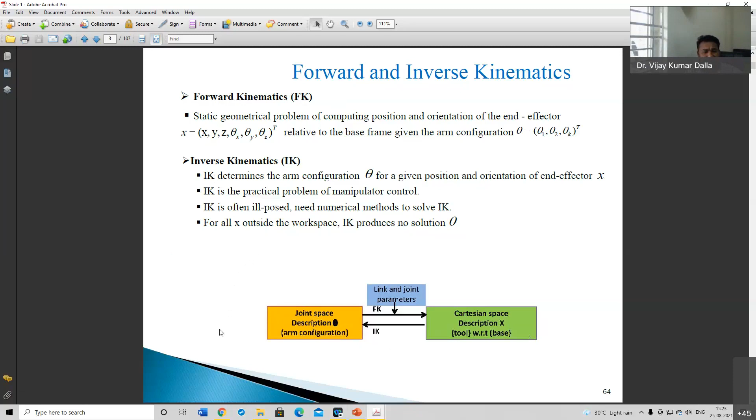And more practical is inverse kinematics. In inverse kinematics, we will have flexibility.

And in kinematics, suppose we want to know about our end effector positions. Here it is described by XE, YE in case of 2D. Also, we can convert it to 3D, so we need to show the Z direction.

This is link 0. The best way is to take the example of a serial manipulator to understand what is a serial manipulator. In a serial manipulator, all the links are connected by the joints in a series - see link 1 here, link 2, link 3, all the links are coupled by the joints. And the end effector - up to the wrist is considered part of the manipulator, beyond this is known as the end effector.

And there are two types of end effectors: one is grippers and the other is tools. Grippers are for manipulating, grasping and holding the object. Tools are like an extended rod, and with the help of this, the robot is doing something like painting or welding. So this rod is known as the tool, and that tool is the end effector.

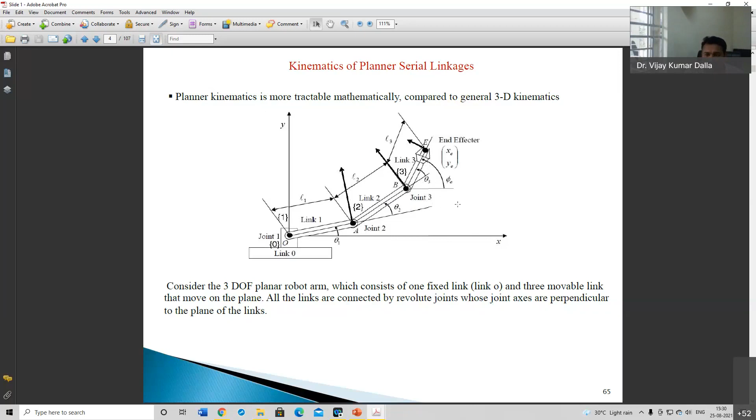XE will be L1 cos theta 1, plus L2 cos theta 1 plus theta 2, then for link 3, plus L3 cos theta 1 plus theta 2 plus theta 3, like that.

This is for the y direction. So we simply have to replace the cos terms by sine. So YE equals L1 sin theta 1 plus L2 sin theta 1 plus theta 2 plus L3 sin theta 1 plus theta 2 plus theta 3. Similarly we can get for the y axis.

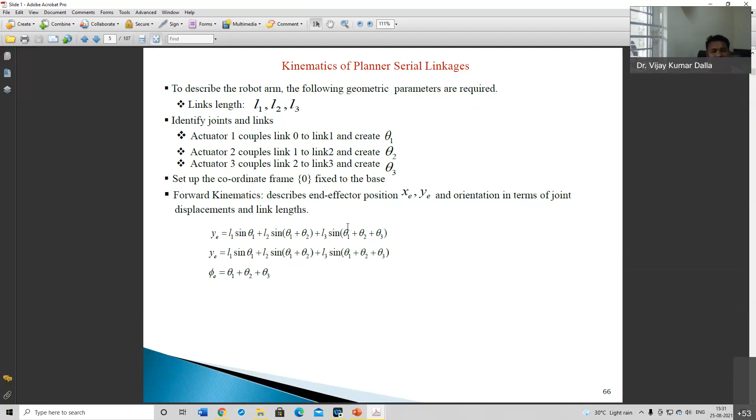So these are the forward kinematics of planar manipulators. What is the meaning of planar? It means we are discussing 2D.

Consider the problem of moving the end effector of a manipulator arm to a specified position and orientation - this part already we have done. Inverse kinematics is more complex in the sense that multiple solutions may exist for the same end effector location, since the kinematic equation is comprised of nonlinear simultaneous equations with many trigonometric functions. It is not always possible to derive a closed form solution - by getting one value and putting it in another, we would get something else, so that is not always possible.

Solutions may not always exist for a particular range of end effector locations. When the kinematic equation cannot be solved analytically, numerical methods are used to derive the desired joint coordinates. In such cases, numerical methods like Runge-Kutta are used.

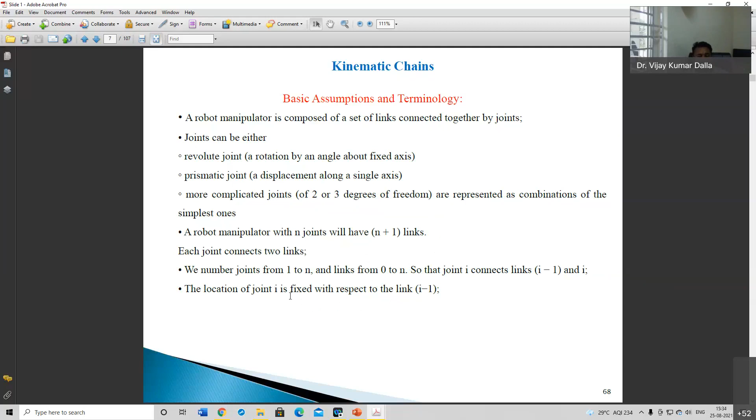So these are some assumptions and terminologies - joints may be revolute or prismatic, with n number of joints and links. We start counting zero for the link, and for joints we start counting from number one.

So this is an example of multiple solutions - see this configuration. It starts from 0, followed by 0 to A, then B, and at this location, this point is known as the reached point. There is another way to reach the same point: 0 to A prime to B. So there are two configurations to reach the same goal point. This is known as the elbow up configuration, and this below configuration is known as the elbow down configuration.

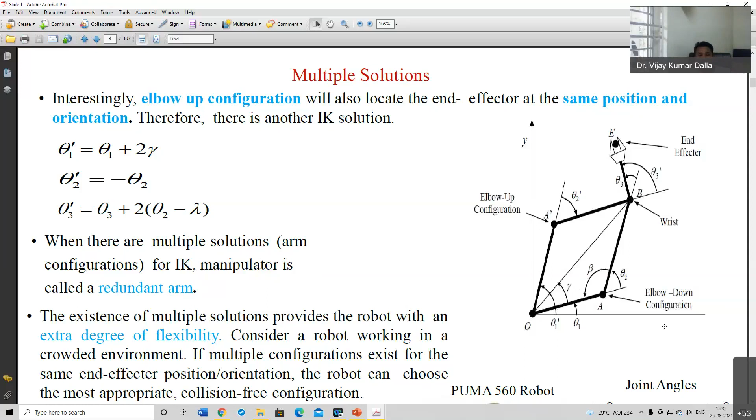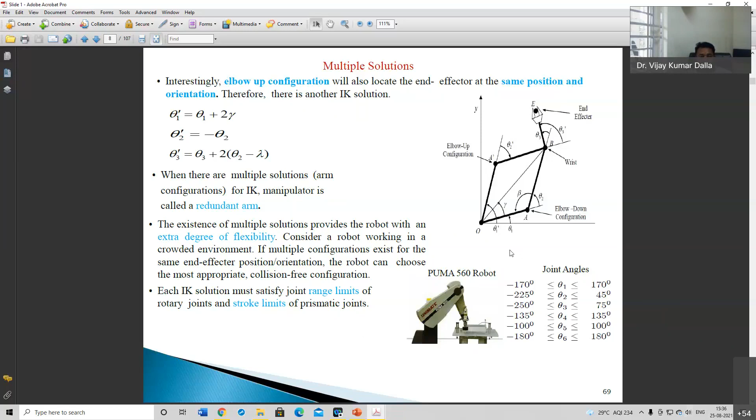When there are multiple solutions for IK, the manipulator is called a redundant arm - to reach the same goal point, if we have multiple ways, that is known as a redundant manipulator. The existence of multiple solutions provides the robot with an extra degree of flexibility, and this is only possible when the robot is equipped with an extra degree of freedom, meaning more flexibility for the robot. So these are some basics.

Now I will come to the software. Then in between I will try to connect. Just one minute.

And regarding software, you need to go to Google, then type RoboAnalyzer, then click the link, then you will find some info about the software.

This is RoboAnalyzer, a 3D model based software that can be used to teach and learn robotics concepts.

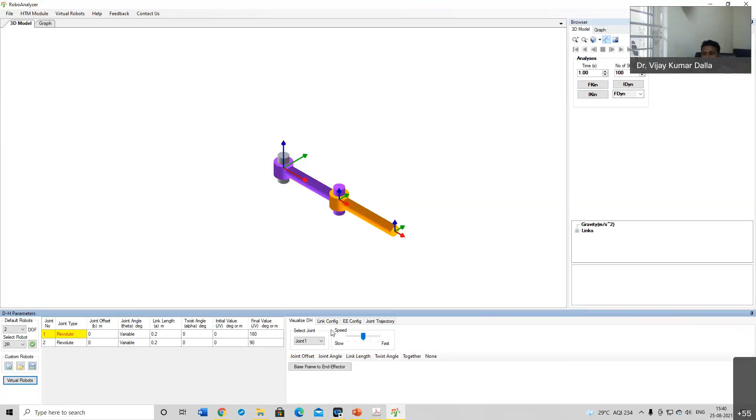Then I will connect the software with the PPT. That will be the better way. So this is the 3D model. We can zoom in and zoom out by using the cursor.

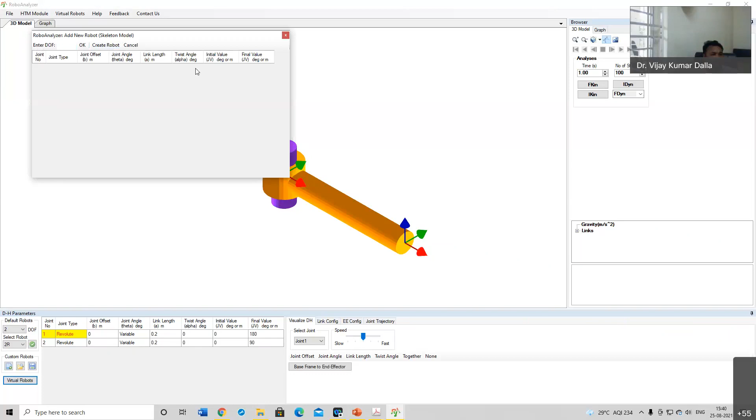The very first, if you see the file, like open. So suppose we have some CAD model, so that we can extract, and HTM module, homogeneous transformation matrix, then virtual robot. So firstly, what is this?

Then we will come to this homogeneous transformation matrix. Also, we can zoom in and zoom out. See here now.

So what is that transformation? Transformation is making movement of the object from one point to another. Like a robot has to clean the glass, so the robot has to move from one point to another point. So there may be multiple rotations, translations.

That is the transformation, and there are 3 types of transformations. If you see on the right side, the first one is translate, second is rotate. Meaning the first transformation is pure translation, the second is pure rotation, and the third is a combination of these two, meaning it may be either translation plus translation, rotation plus rotation, or translation plus rotation.

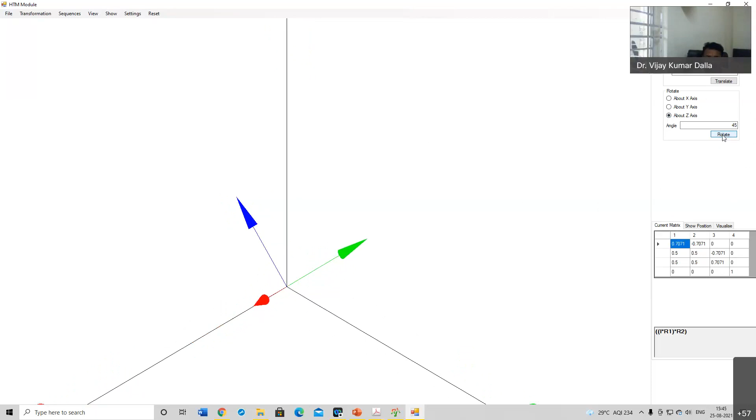Now see this, for better understanding you do this. Clear. Suppose y is equal to 60 degrees. Resetting, 60 degrees. So it is rotated by 60 degrees about the y-axis.

Now suppose we want further rotation, meaning combined transformation. One is already done, another we want.

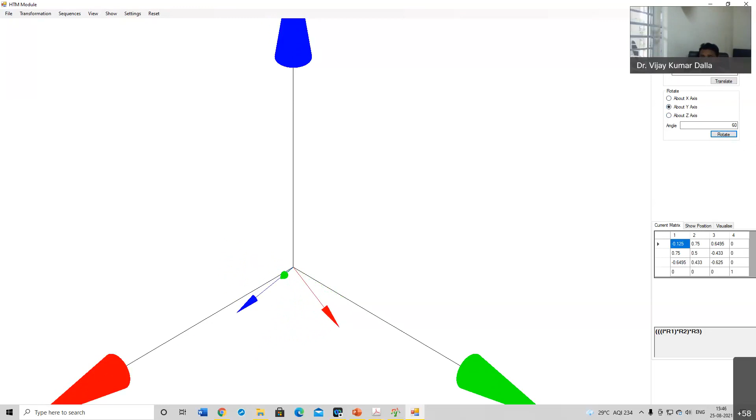And suppose we want to translate it. Y is equal to, suppose 5 units. So this is the example of combined transformation.

Yeah, name of this software, RoboAnalyzer. In Google, you can type and you can find it.

Resetting the translation, rotation, and combined transformations, we have visualized local transformation versus global transformation. So what is happening? You see R1, R2, R3, and T4. R1 denotes the rotation matrix for the first transformation, R2 for the second, R3 for the third, all rotations.

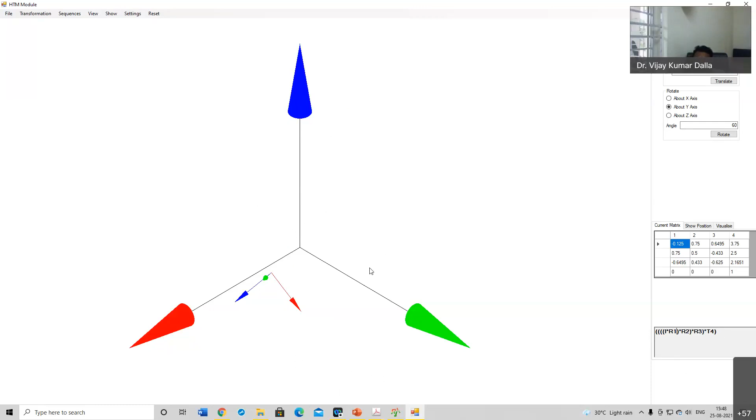And fourth is translation, T4. So again, I am translating x equal to suppose 5, and see the sequence of transformation. Now I'm doing translation, so T5 will be there. T5 will be pre-multiplied or post-multiplied in local transformation. Local transformation means whatever transformation is going, it is in the manipulator, not with respect to the base or some other frame.

Suppose there is some frame here and the end effector is measured first with respect to the base, then with respect to this third point. Then that transformation will be known as global transformation.

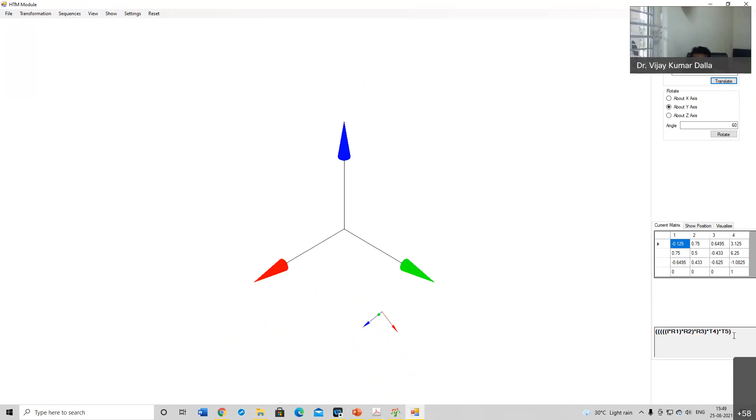So in local transformation, once again observe, I'm just pressing the translate button, then T5 will be pre-multiplied or post-multiplied of this. So it will be post-multiplied. Now resetting it and clearing the values.

Now just clicking global transformation. And x equal to, I am putting here 2. See, T1 is here. And suppose I want a rotation about 20 degrees, so R2 will be there. Now see, R2 is here, pre-multiplied, not post-multiplied.

So in local transformations, the sequence of multiplication means the new transformation will be post-multiplied. But in the case of global transformation, the new multiplication will be pre-multiplied.

Now observe this matrix, the size is 4 by 4. So the last column, number 4, represents the end effector position vector. Like this is the x value, end effector in the x direction is 1.8 something, and y 0.68, z 0.

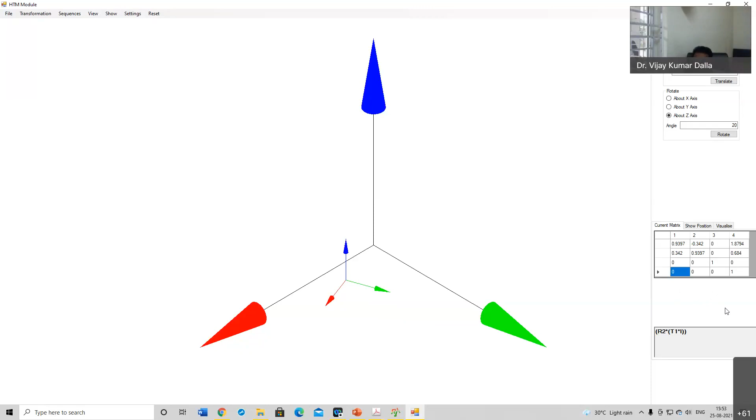In the perspective matrix we add 0, 0, 0 and 1. This means we are zooming out, to view things at a larger scale the perspective matrix is used. So here we have converted the rectangular matrix into a square matrix, because for multiplying, all dimensions should be matching, meaning rank should be the same.

So the transformation matrix should be square, its dimensions should be matching, so that we can analyze the system, which is the robot. Analyze means we can get the equations. Without writing equations, we cannot visualize or realize the motion of the manipulator. So please allow me a 2-3 minute break, then I will continue.

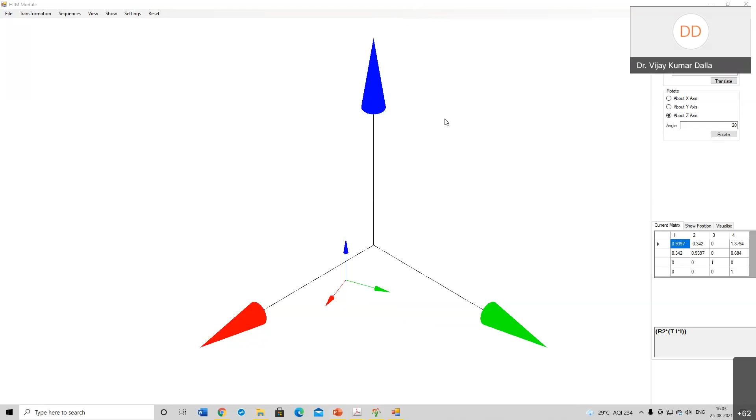Yeah, shall I restart? Yeah.

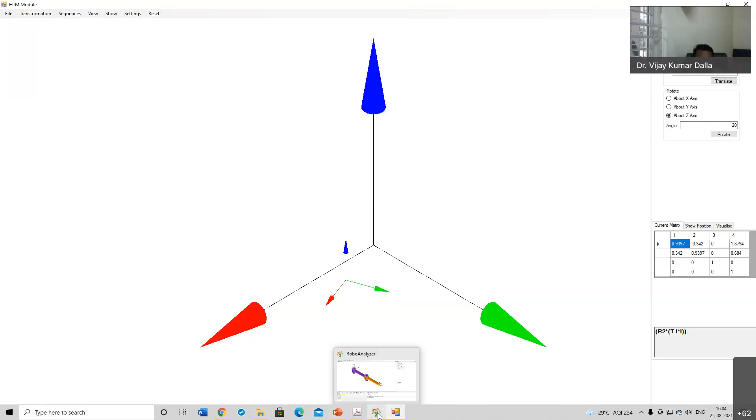Now coming to the main software, RoboAnalyzer. But please confirm whether I am audible or not. Am I audible? Yes sir, you are audible.

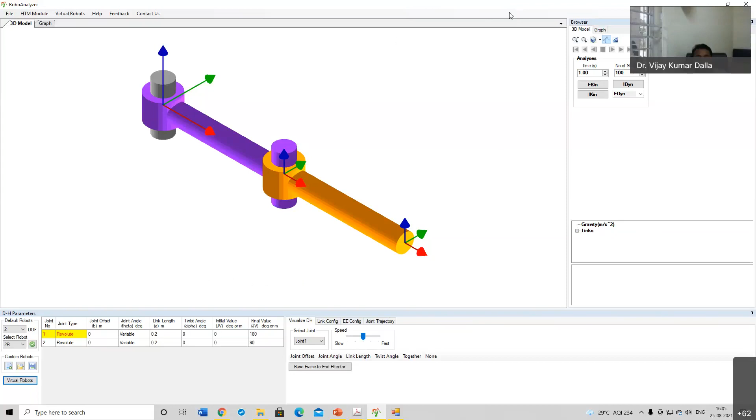So see, it is the 3D model, and motions one can visualize either through this 3D model or the graph. So graph results we can see, meaning the nature of motions we can see, but here we can visualize the motion.

And then just below, see the DH parameters. DH parameters specify the configurations of the robot or the convention, and there are four parameters: joint offset, joint angle, link length, twist angle. Joint offset, in this case all joints are revolute, so joint offset is only for prismatic joints. Here all joints are revolute, that's why joint offset values are 0.

And here joint angles are variable, and the link length is 0.2 meter each. Twist angle is 0. Why? Compare the coordinate system at the base, joint 1, and the coordinate system at joint 2. Both axes are in parallel, meaning no axis is intersecting or crossing each other. That's why the twist angle is 0.

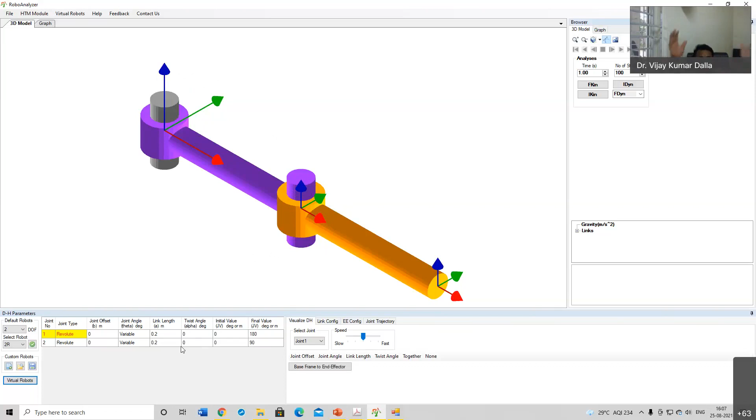See, my both hands are parallel, but suppose at a point they intersect each other, then there would be some twist angle, but here there is no twist angle. So DH parameters, full form: Denavit-Hartenberg parameters, named after two scientists. There are four parameters: joint offset, joint angle, link length, and twist angle.

And see the default robots here, from 1 to 7 degrees of freedom robot we can access here.

Select a robot based on the types of joints. So 2P means 2 prismatic joints, 2R means 2 revolute joints, PR means prismatic-revolute, RP means revolute-prismatic.

And the virtual robot, this is the virtual robots that we will see at the last.

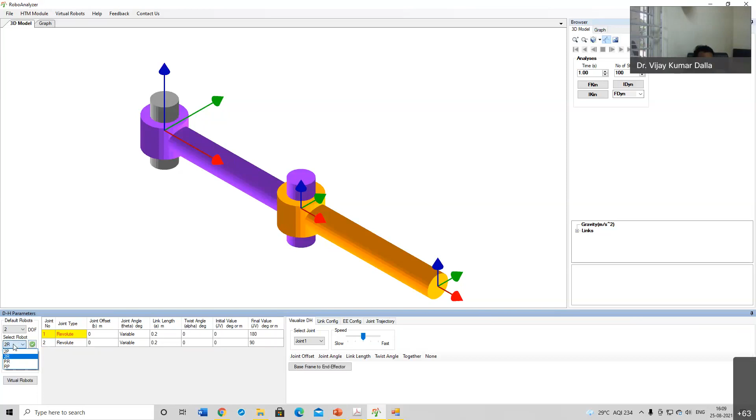This is 2R. Suppose we want to see the 2P, we have to load the selected robot by clicking here. Suppose we want to see the motion of the coordinate system, so we need to click this base frame to end effector option. It takes values from this DH parameter table. See, it got rotated by minus 90 degrees and translated by 0.15 meter. So this we have done.

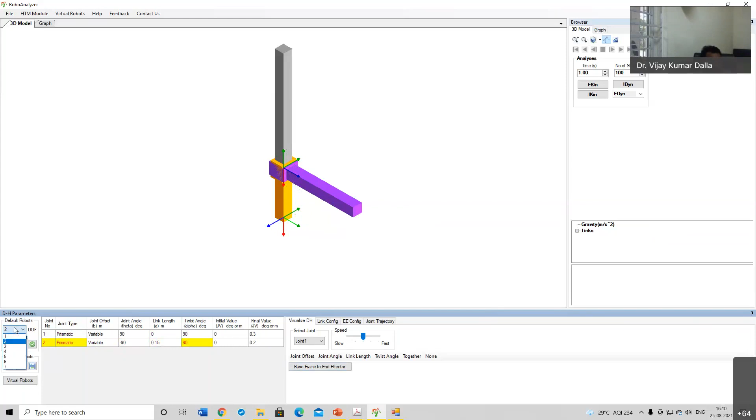Also suppose this 5-revolute robot, or this one, any one we can choose. This is your CAD model.

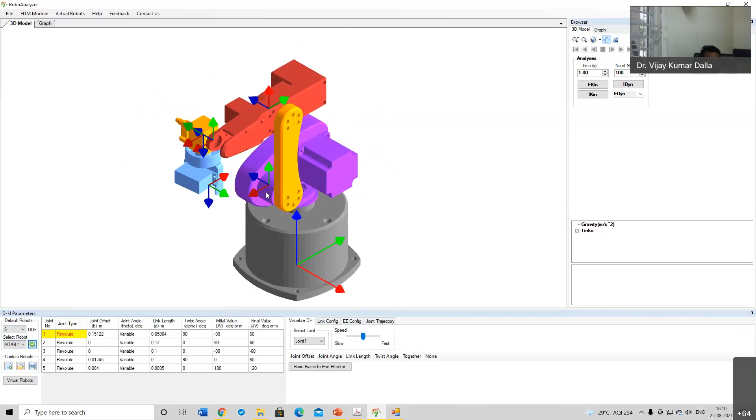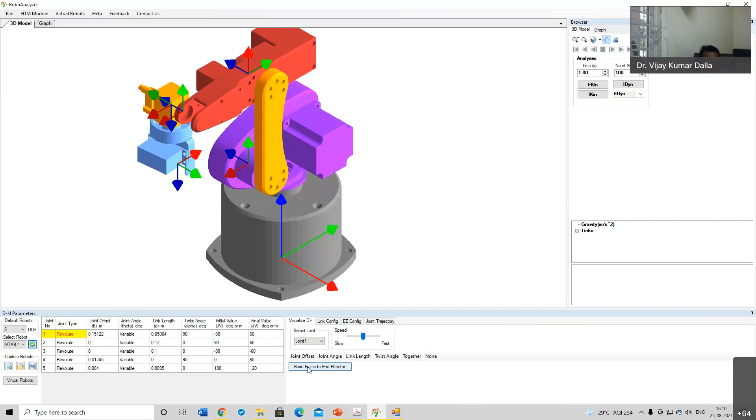Now see the number of joints, 5 joints. If I click this base frame to end effector, it will take the values of this table and behave accordingly. So just observe what is happening.

Take a 90 degree twist angle, then it moves to joint 2. This is your joint 2, where the joint angle is variable. The link length is 0.12, and there is no twist angle here.

Now joint 3, it got translated here from here to here, then it will rotate. In this way we can visualize it.

What are these? Visualize DH done. Link configuration: by clicking this update, this is the link configuration with respect to the previous link. And if we take it with respect to the base, this will be with respect to the base.

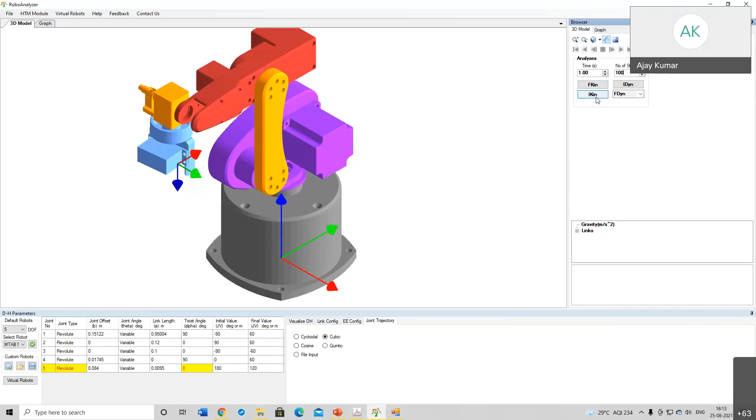Then there are 4 buttons: forward kinematics, inverse kinematics, inverse dynamics, forward dynamics. Hello, hello. Are you audible, sir? No problem. Yeah.

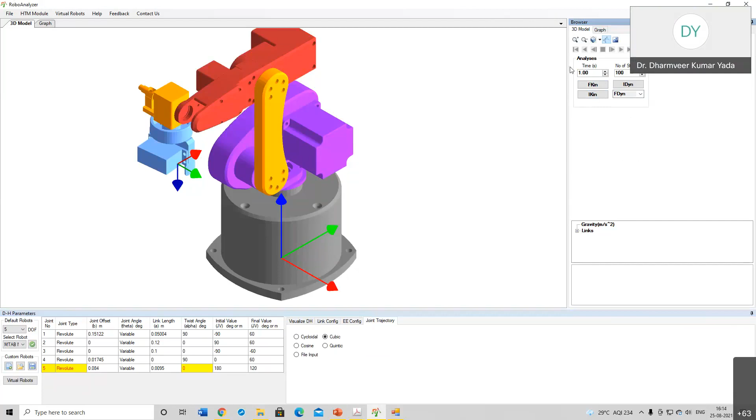So forward kinematics, then inverse kinematics, then inverse dynamics, then forward dynamics. Forward kinematics and inverse kinematics we have done. In forward kinematics, what do we find out? The end effector positions. But in inverse kinematics, we find out the set of joint variables.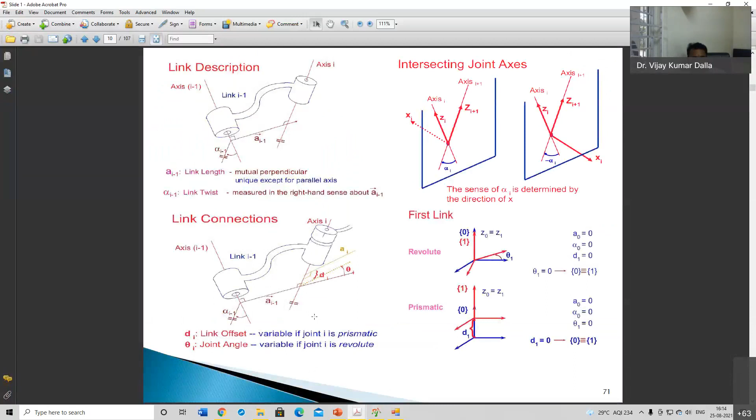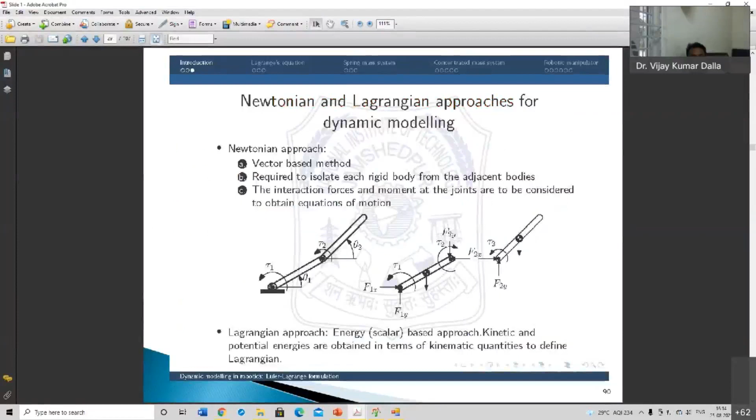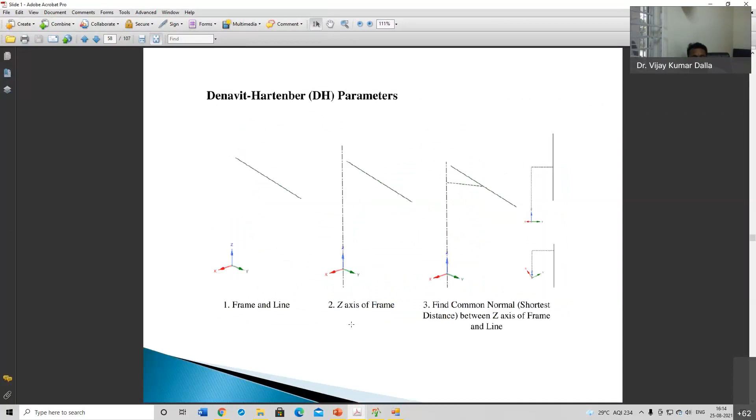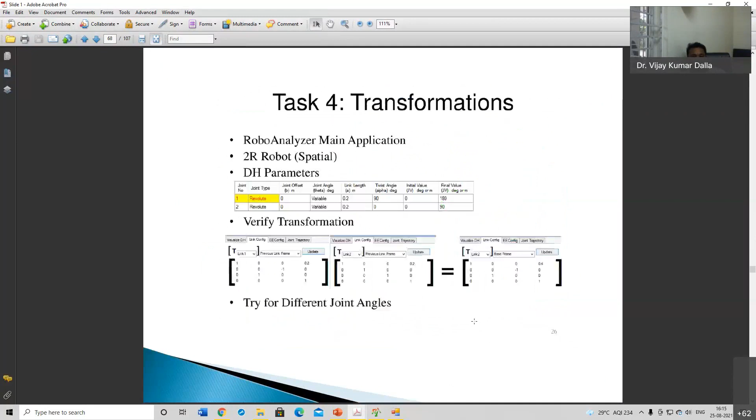What about dynamics? It is the study of forces and moments causing the motion of links. This is dynamics, and there are two types: forward dynamics and inverse dynamics.

What is forward dynamics? In this, the joint forces or torques will be given, and the output will be the joint acceleration. For a given joint force, finding the joint acceleration is known as forward dynamics.

And if you reverse it, for inverse dynamics, the input is motion, and the output is the cause of motion. You have to remember this.

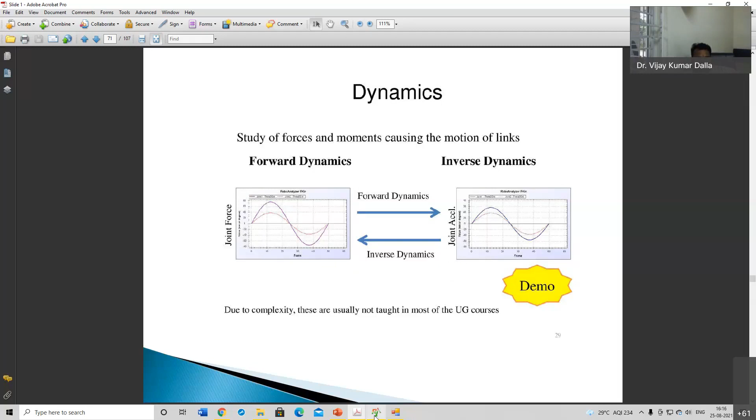So again coming to the software. We have done forward dynamics and inverse dynamics. In forward dynamics, what will be given? The forces or torques will be given, and what we have to find out are the accelerations.

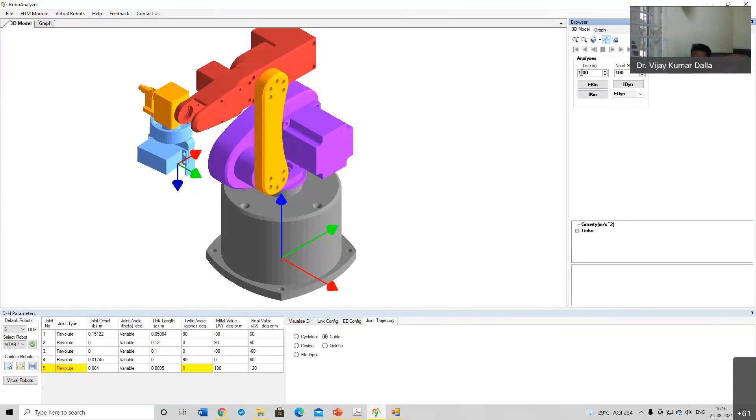This time we can change for our convenience, and the number of steps also we can change. From here also we can zoom in.

Now I'm clicking forward kinematics. Just observe, yeah. After clicking, it is showing analysis is complete.

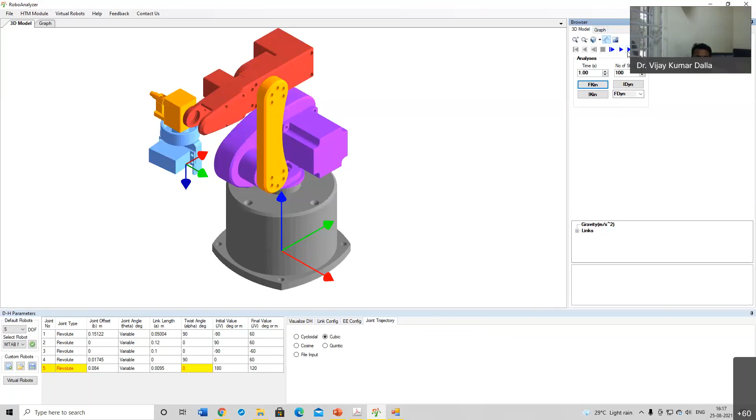Now we want to see the motion, so by clicking animation we can see it. Now see the motion of this manipulator, and the trajectory here is cubic trajectory.

The difference between trajectory and path: generally we say this is the path, but instead of using path, we should use trajectory, because trajectory is time dependent, while path is time independent, and time matters in robotics.

So this is the trajectory of the manipulator, this is the starting point, and this is the end point, also called the goal point or set point. So forward kinematics we have done, motion we have visualized, and now we want to see this graphically: the x-axis represents time, and this shows the positions of the end effector.

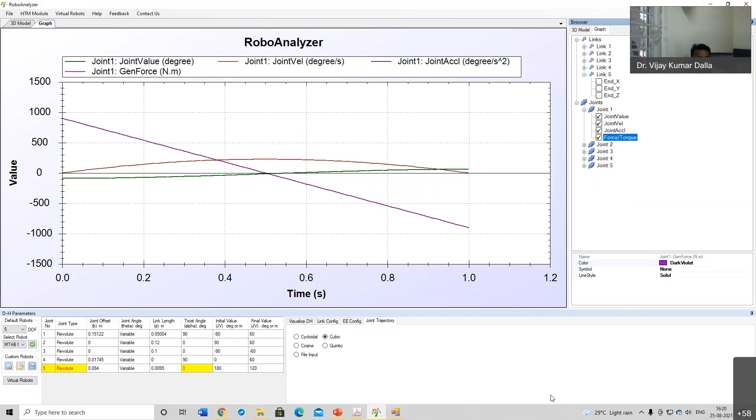So up to this is the example of only kinematics. Now, for inverse dynamics, what do we have to do? We need to click, after forward dynamics, we need to click inverse dynamics. Then suppose we want to see the motion, we have to play, or directly you can see...

The values of force and the torque. See how it is behaving, how the value of input torque is varying with respect to time.

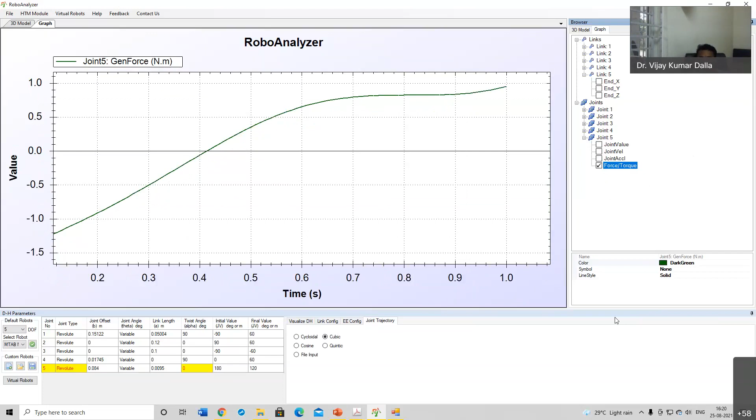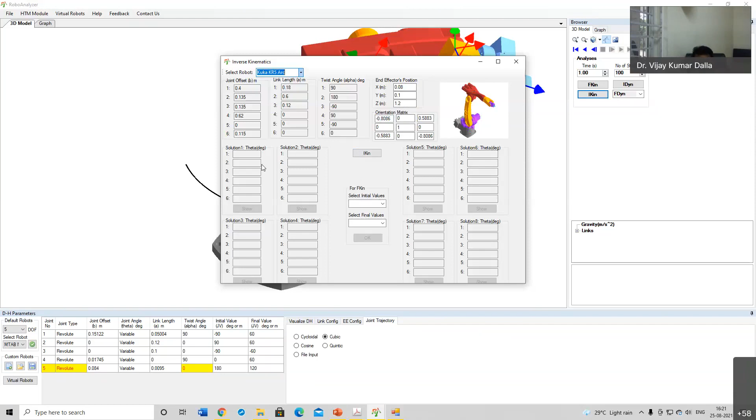Okay, this we have done. Now coming to the inverse kinematics. After clicking this inverse kinematic, one new window is displayed, and you see there is a robot, and the types of robot we can change as per our convenience. These are the inputs: joint offset, link length, twist angle, and effector positions. If you remember, in inverse kinematics, the end effector positions will be given. Now, if I click this inverse kinematics, all the set of joint variable values will be updated here.

After clicking, all the values got updated here. Now, what is this? What is the significance of this? We have 8 solutions here in this software. Only 8 solutions are displayed. So what are the meaning of this? Like solution 1, solution 2, solution 3, 4, 5, 6.

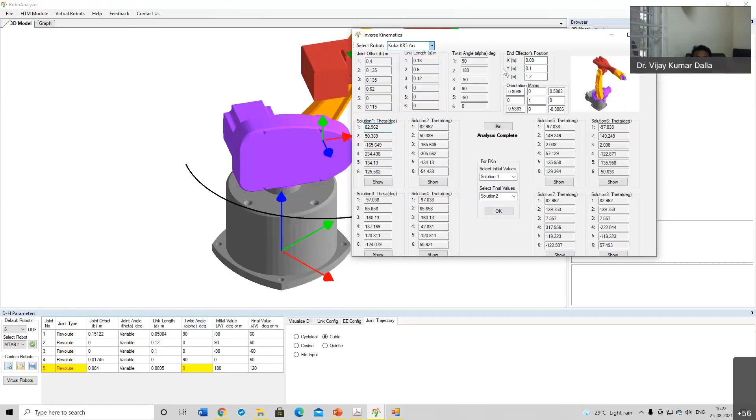To reach the same goal point, we have multiple ways. Here 8 ways, there are 8 ways to reach the same goal point. So suppose I am clicking this, then you just observe what is happening. See, the robot is same. The robot is same, but see how this configuration got changed.

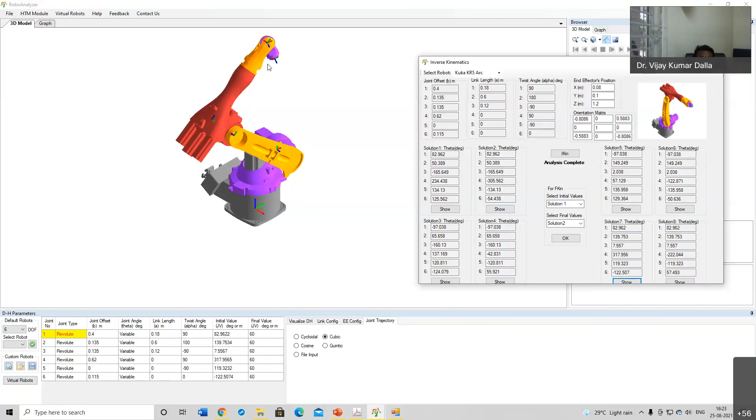Now suppose I am taking solution 5, solution 8, solution 3, solution 4, solution 7. So what is common here? The common is the end effector position. But the joint, meaning the configuration of the robot, is changing. So to reach the same goal point, we have multiple solutions. So this is the inverse kinematics.

Am I audible? Yes, sir. Yes, sir. Yeah.

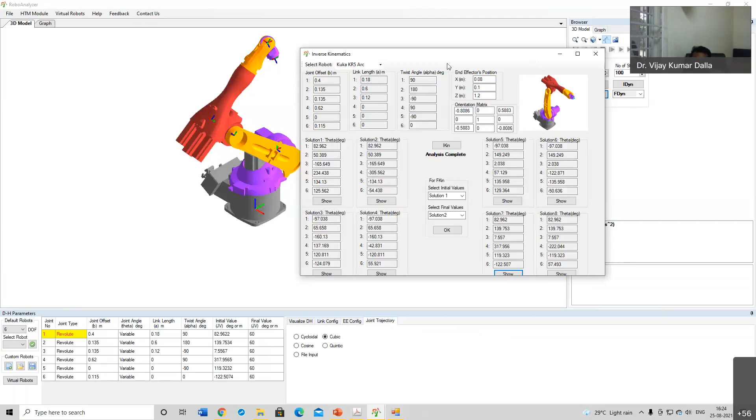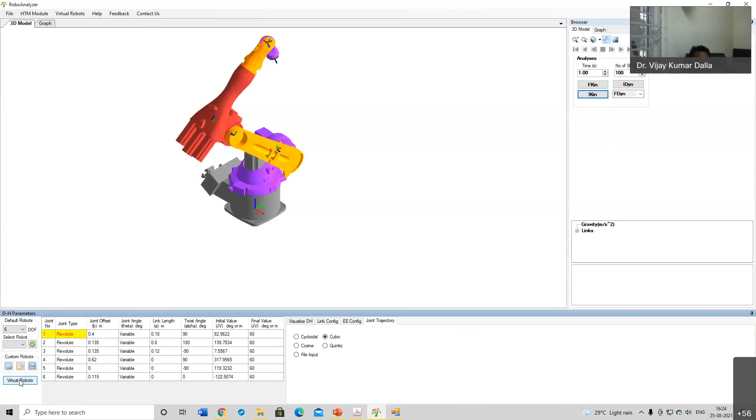Now this we have done. Now coming to the virtual robots. This is the last one.

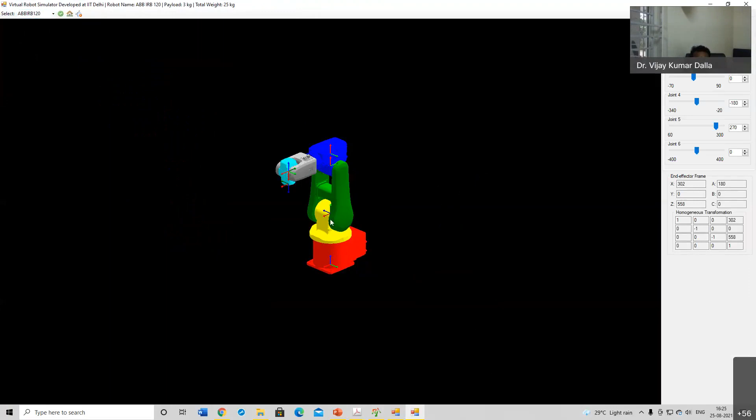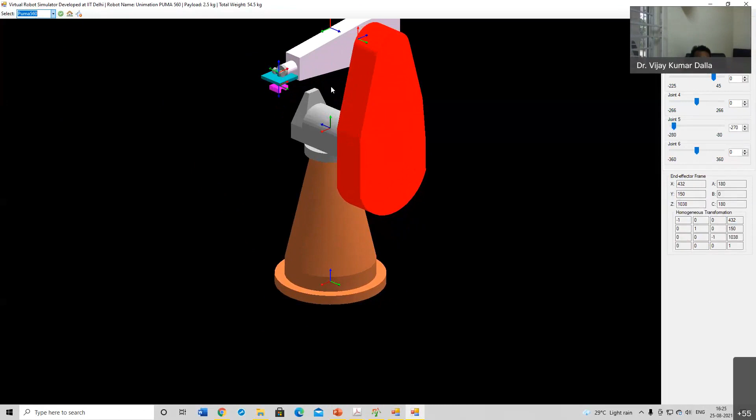See, after clicking this window virtual robot, this is displayed by default. This ABB IRB 120 is coming, but we can change it, suppose to KUKA, or something else, Puma.

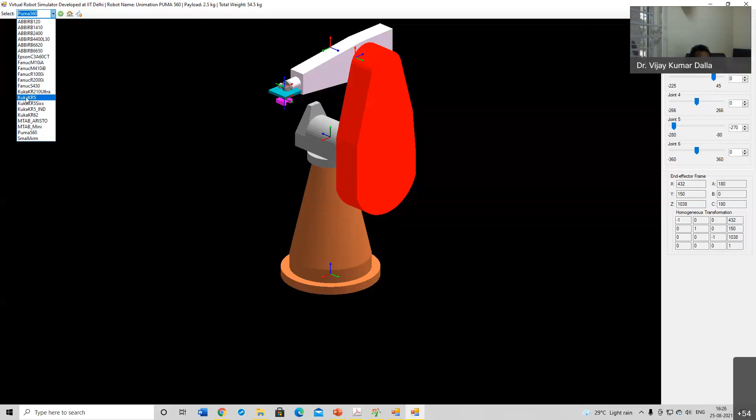Now you just observe the right side. They are joint control, Cartesian control, then record. Now suppose I am taking here, for better visualization, this KUKA.

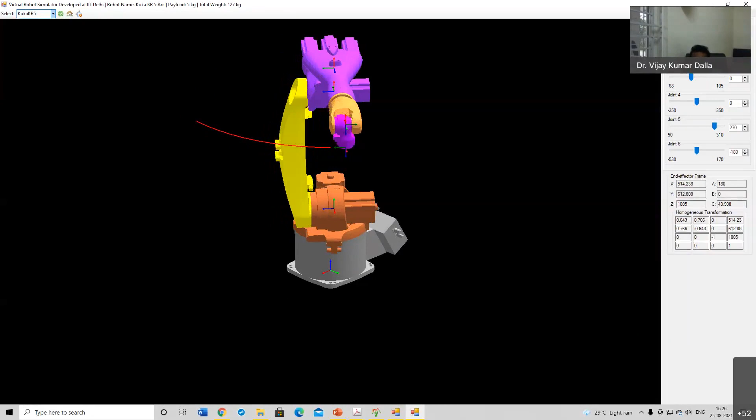Now, can you identify the joints, which is joint 1, 2, 3, 4? So for better visualization, I am clicking joint 1, see which one is joint 1. The joint which is moving, you can see it, the rest is all fixed. Where is it moving? Here it is moving, rotating. And suppose joint 2, now here is joint 2.

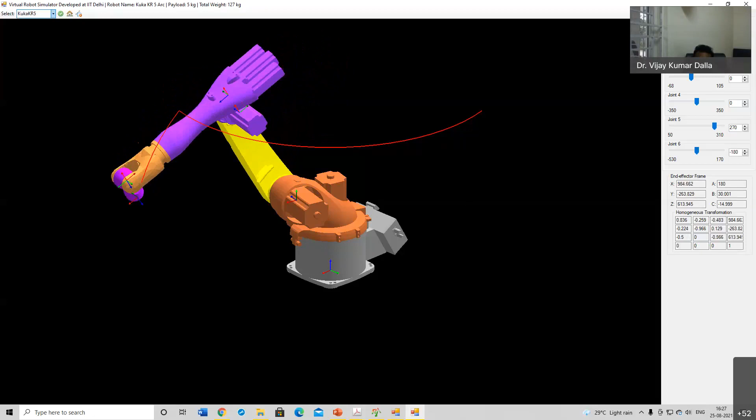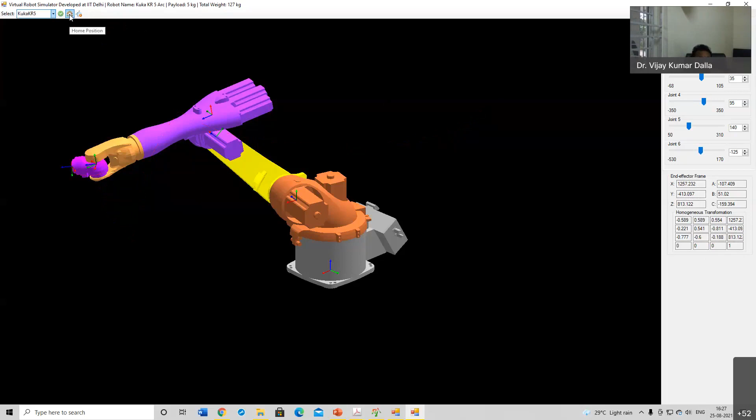In this way we can visualize, and just below we see the end effector frame X, Y, Z values and homogeneous transformation. Now, clearing the traces, coming to the home position. Now coming to the Cartesian control.

The Cartesian control is also known as jogging. Now what we will do here: position is, suppose increment position, in every step only 1 mm movement will be there, or by angle 0.5 degree. So this we can change. If we need quick movement, so we can change it.

Now let's increase it more and see what happens. Now see. Now the task is to make a profile, or you can say a welding profile of rectangular kind. Okay, so what we need to do, I'm jogging, I'm clicking y minus.

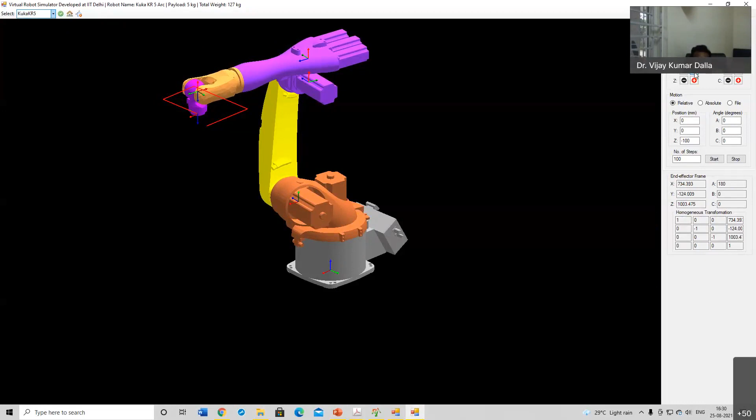Yeah, starting and the end point is mismatching, so here the end point and the starting point is not same. There's a slight error that came up.

So this is the rectangular profile, so in this way we can visualize, we can control the robot either through the joint control or through the Cartesian. In Cartesian, here we are controlling the end effector, but in the joint control we were controlling only the joints.